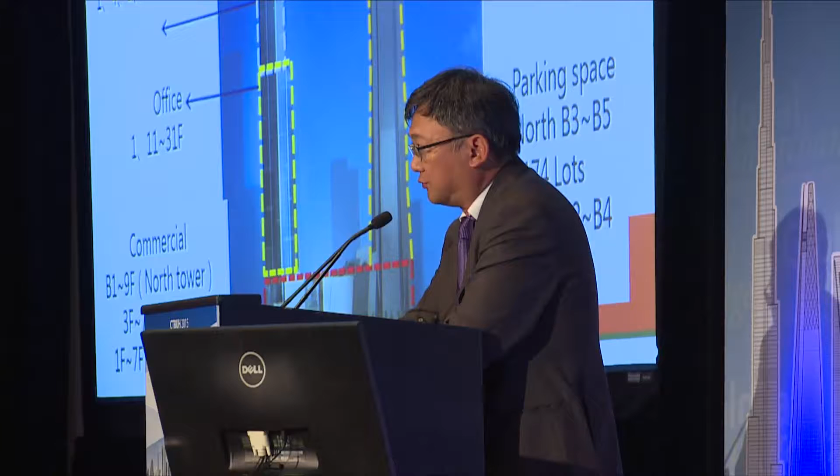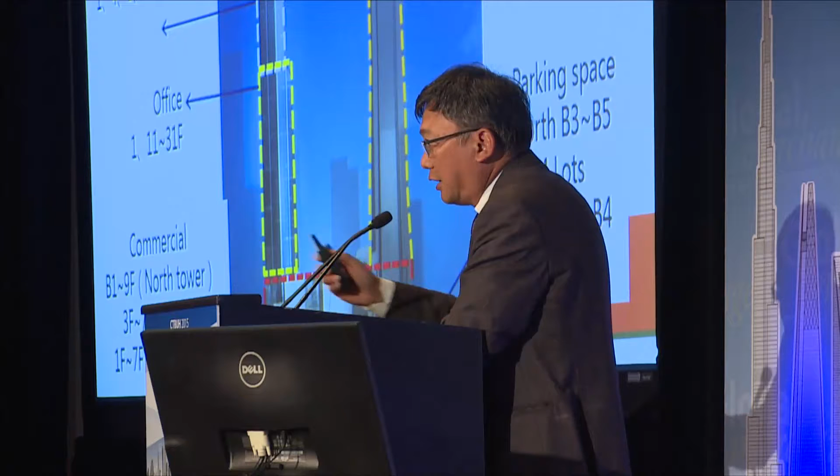We do have a commercial component like a shopping arcade at the podium level, which will support users of the office and also serve the vicinity as a high quality shopping area. We have 5 basements, dug up to around 25 meters, providing mechanical space in the basement, as well as 1,600 lots of car park.

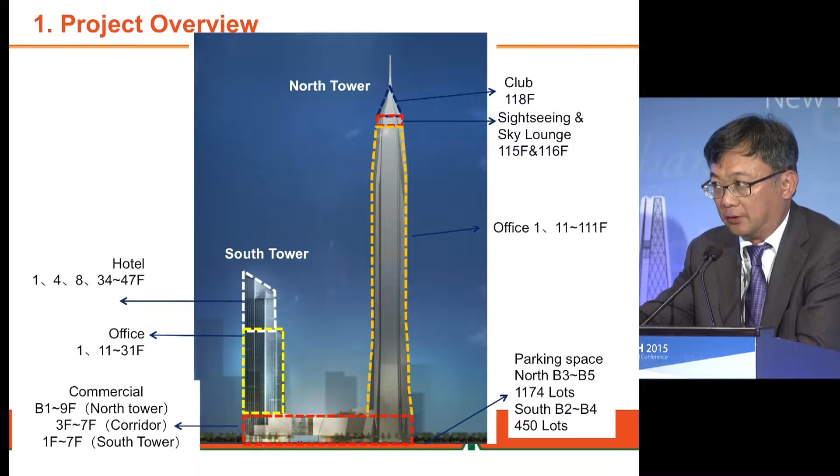Location-wise, we are very close to Hong Kong ICC. There is construction of the express railway from Hong Kong to Shenzhen, which will take 14 minutes, so that's the connection point to Hong Kong. We also have local connection through the MTR system, with 4 lines connecting to the site or the building.

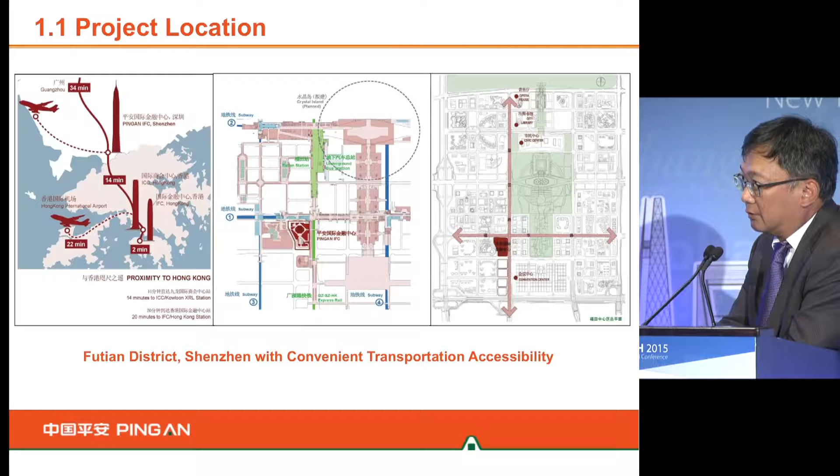We're also sitting on the axis of the municipal building, connecting the convention center and the municipal city hall at the center of the axis. We are actually founding the axis, which is very obvious in the location.

Figures about our building - this is the North Tower. I won't go into detail, but there is a 19,000 square meter site, and the total construction area above ground is 377,000, and the total construction area is close to 460,000 square meters. So we are talking about very high density development there. We have 118 floors above ground altogether, and everything - we have a hybrid structure with outrigger.

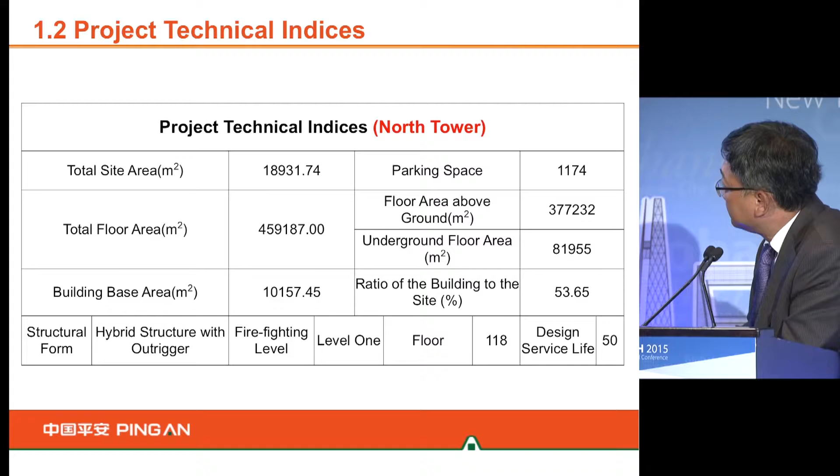This is the South Tower, 300 meters in height. We have 52 stories. The total area will be close to 200,000 square meters on an 11,000 square meter site.

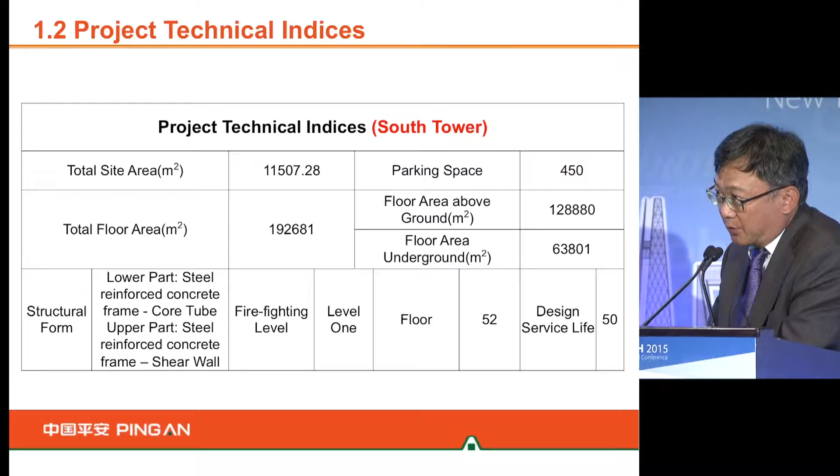Talking about the North Tower, the ideas come from the architect as well as Ping An's culture. Ping An is an insurance company at the beginning - we started our business in 1988 as a small insurance company dealing with property insurance or shipping. In these 27 years, it has expanded its business to banking as well as investment. So our project office is actually funded by the insurance arm, Ping An Life Insurance.

The idea is taking up the forces, and we want to improve ourselves daily, monthly, yearly. We want to go up and up - that is the idea of the corporate culture. So Ping An is improving, not just for getting more profit, but also to be more advanced in serving the public as an insurance company, as well as expanding our banking service. We also want to go more advanced.

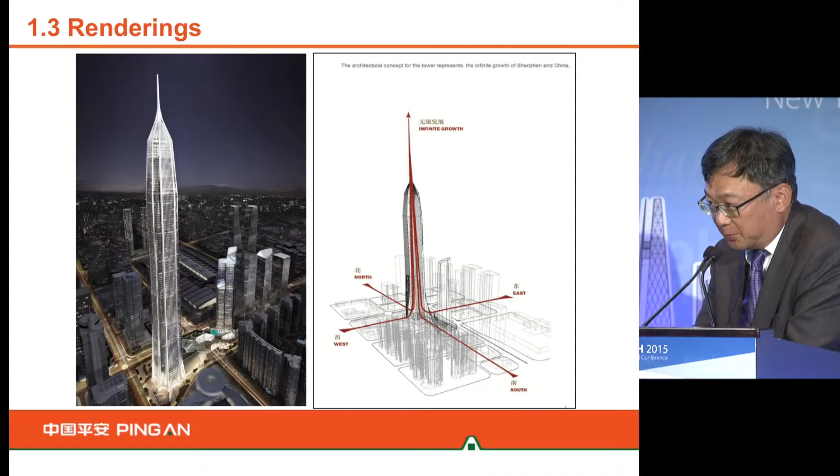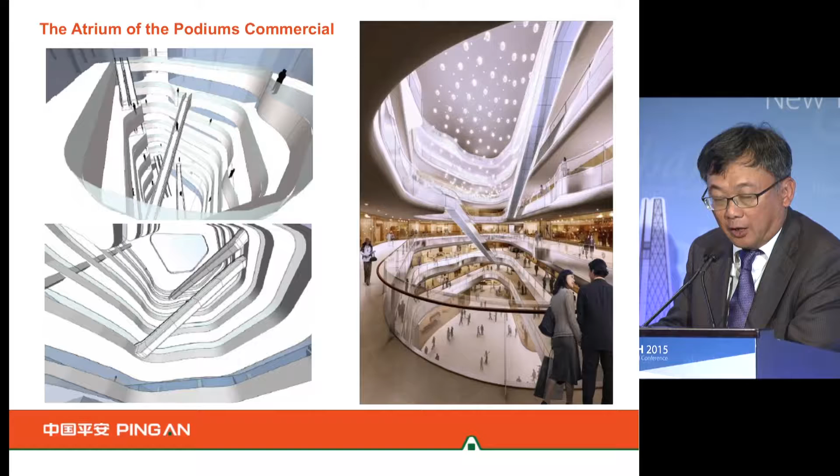Our podium takes a very free-form and organic shape internally, but externally is very solid and iconic in nature. We have a high ceiling lobby, but we want natural light to come in, we want natural materials to be fitted, and we want people to easily go around the building. We have multi-story lobby levels, so people can easily find their way up to different floors.

We mainly use around 50 double-decker lifts to resolve the demand of vertical transportation.

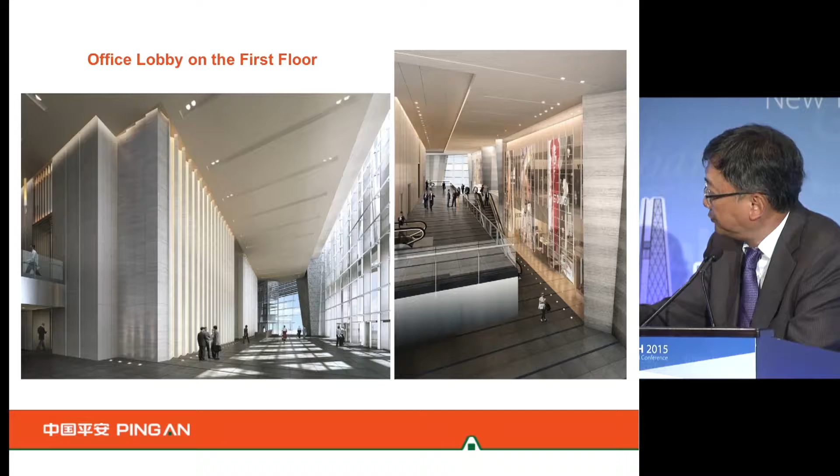Typical floor looks very square. We have a 32-meter square core, nearly square core, with about 13-meter depth span, leasing span. When you go from the bottom, it is even bigger, going from 65 to around 60 meters or even less as you go up to the top.

We have mega columns as the outer rim connected by mega frame, and we have a reinforced concrete core inside.

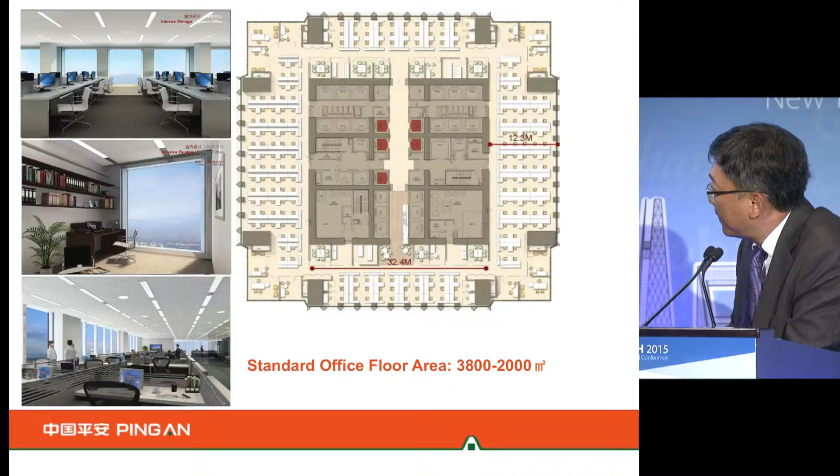Observation deck at the top to serve public interest, to be a landmark building. We need to bring people up to the sky or to the height so they can enjoy the view around the city.

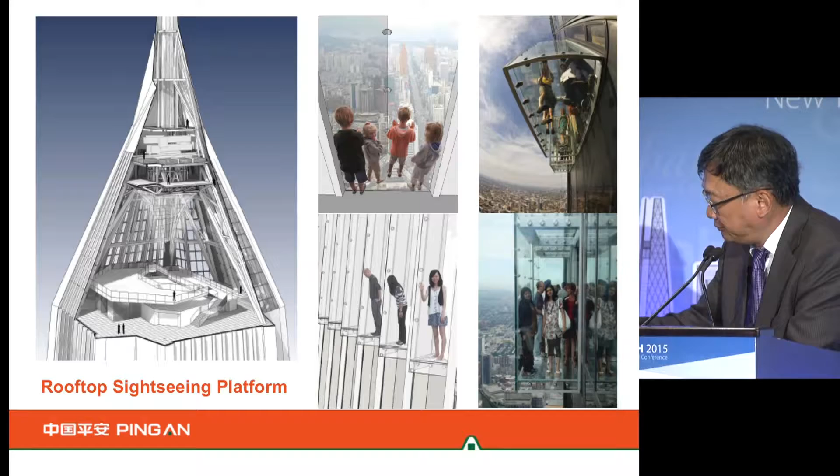We want to create seamless connection between the building and the vicinity. We use minimum identification between the boundary, and we want soft landscape to go together with the hard paving to create a friendly and inviting entrance. The glass at the bottom will give us a very transparent feeling.

We also create landscape or interested outdoor areas. One is for dining, one is for the shopper, to relate to the natural external.

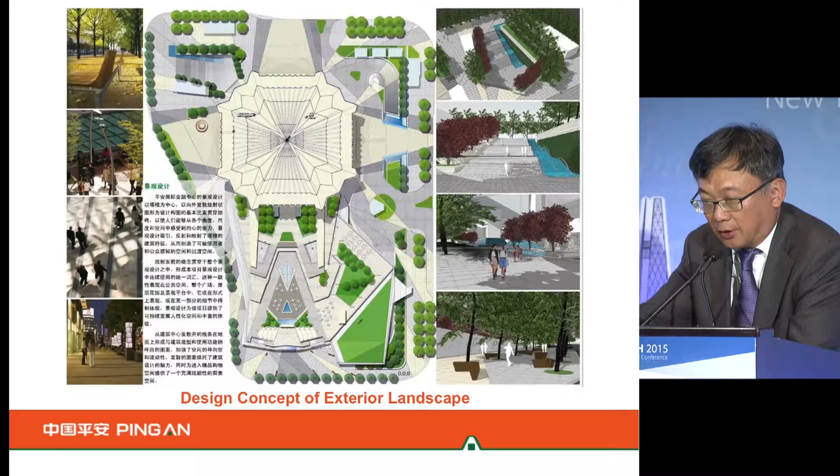We take a look at the structure of the building, because that will give you the idea of the bulk of the construction work, and then relate to the risk in the construction process.

Basically, as I mentioned, it's an RC core strengthened by the shear wall inside, and also reinforced by Outrigger. I think there are 4 Outrigger trusses, which give the rigidity of the structure, connecting the mega frame outside and the inner core internally.

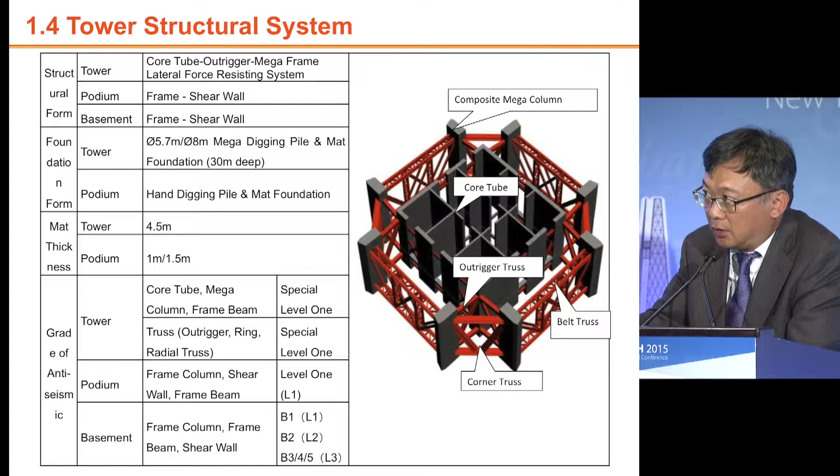So there is a simple diagram showing we have the RC core plus the Outrigger at 4 levels, plus the mega frame externally with cross bracing, making the structure very rigid and strong.

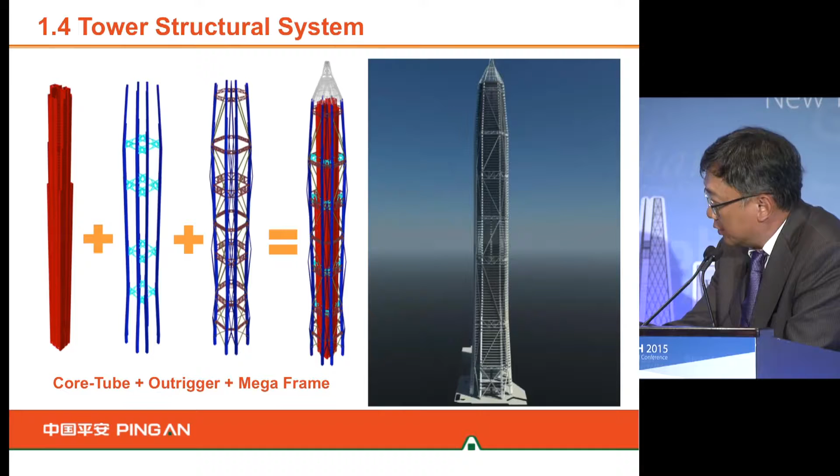That tells you how complicated the steel connection is - all prefabricated steel elements hoisted from the ground to the appropriate level and welded at height. So you will see the complexity of the structure in this diagram.

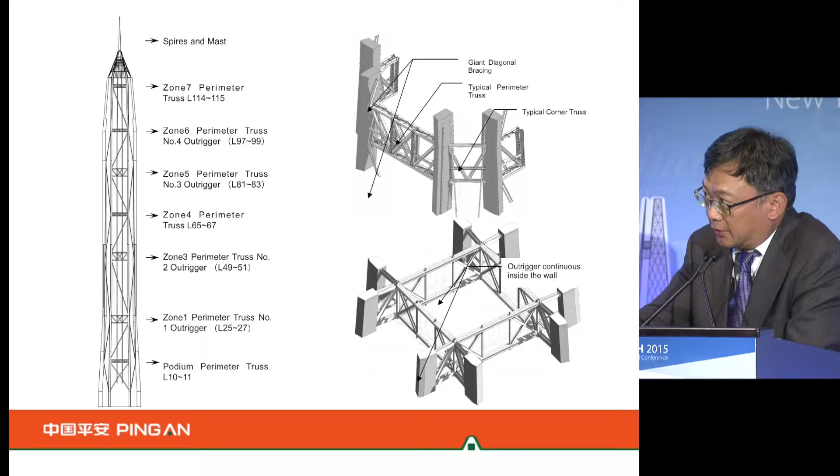And the construction risk that we are facing throughout the construction period - I found the underground structure, although not seen, is very risky and time-consuming.

We need to dig very big piles. The biggest one is 8 meters in diameter, ranging from 5.7 to 8 meters. And it is sort of a hand-dug process. When we say hand-dug, it's a manual operation, not actually with your hand.

So there will be 16, around 6-meter piles to support the core, and 8-meter diameter piles to support each of the mega columns, and there are 8 in total.

We put reinforcement one by one in the pile before concreting. So these are all manual operations, and you can see there's high risk working in this situation.

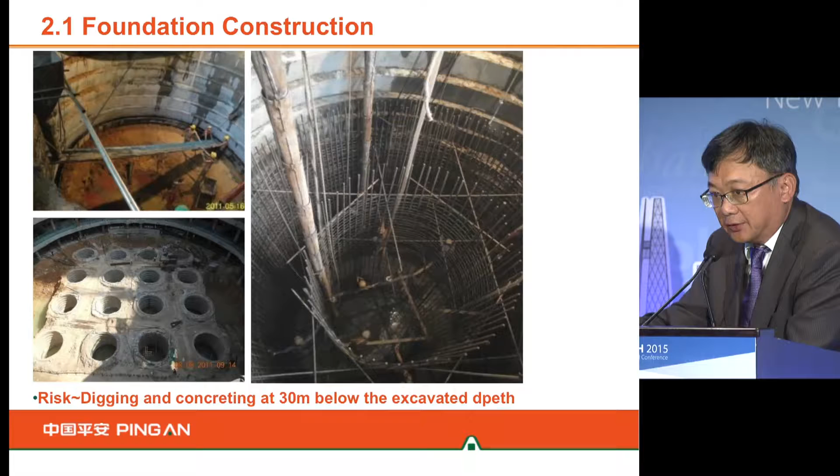There are also risks externally, like natural risk - typhoon, flooding - and we need to hoist heavy steel structure to the top of the building. So it's another risk that we need to face.

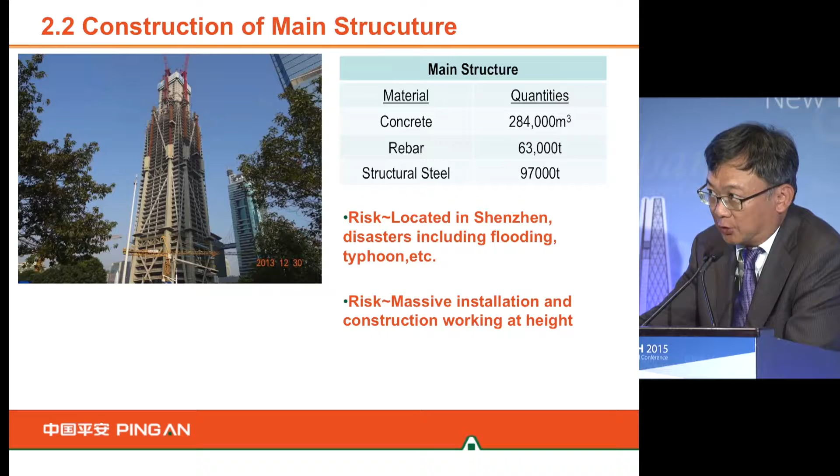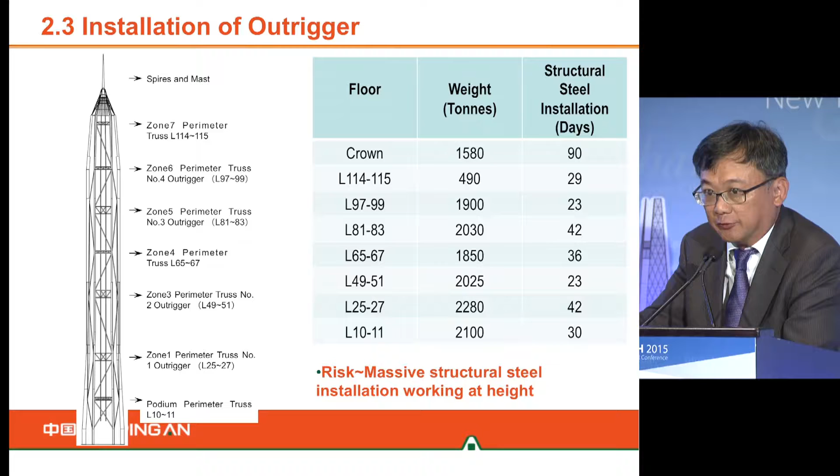For floors, we can go up to two days per floor, and somehow we spend 7.5 days - it depends on the complexity and whether they are standard. So we carefully plan our workforce and round the clock to make sure we do it in a very efficient way.

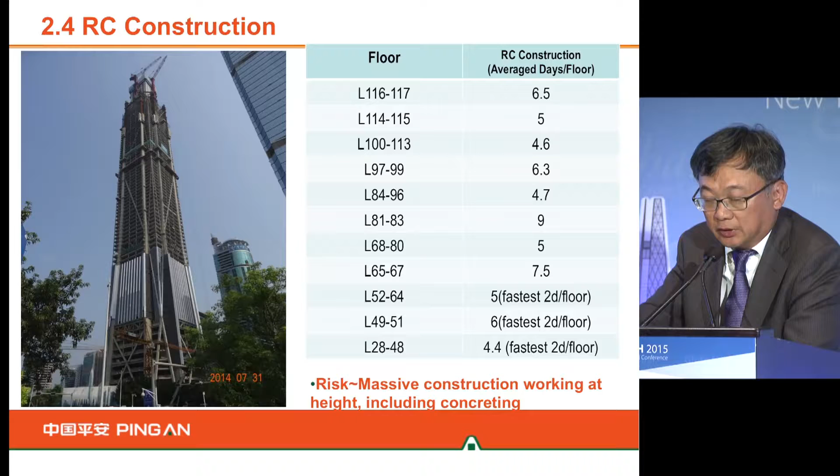Curtain wall system - it goes up to 17,000 panels, and the figures about the glass, aluminum, and stainless steel. So I leave it to you to read.

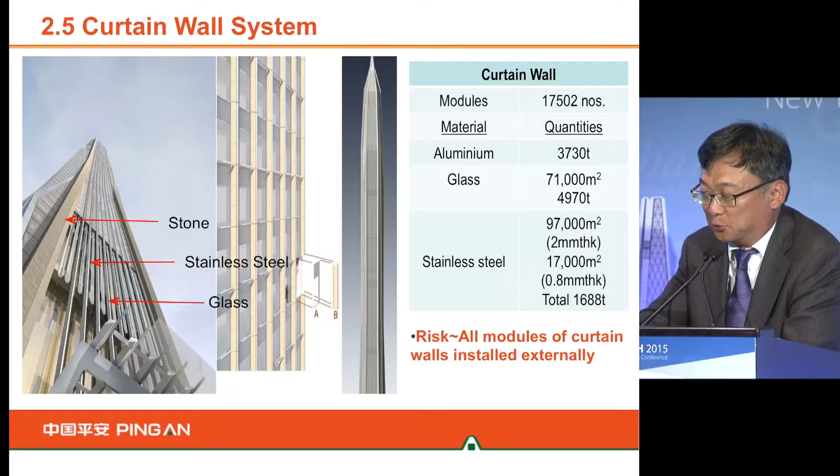By end of the year, we will finish the top part of the curtain wall. By April next year, we will finish all the work for inspection.

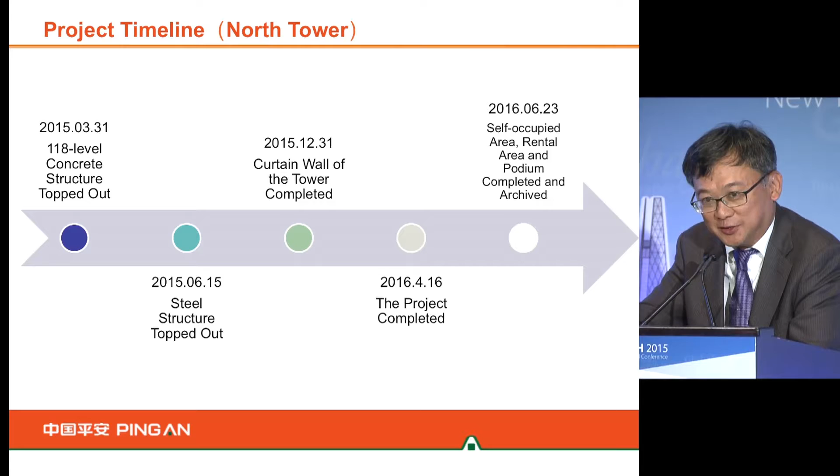At the mid of next year, our headquarters will be in use. So these are very aggressive targets. I think one reason is because we have waited a long time to move in as the headquarters of Ping An. And Shenzhen is longing for a landmark in the vicinity. Most important, we have commitment to the council about next year's conference. So we have to do it.

So the third section, I leave it to Stephen.

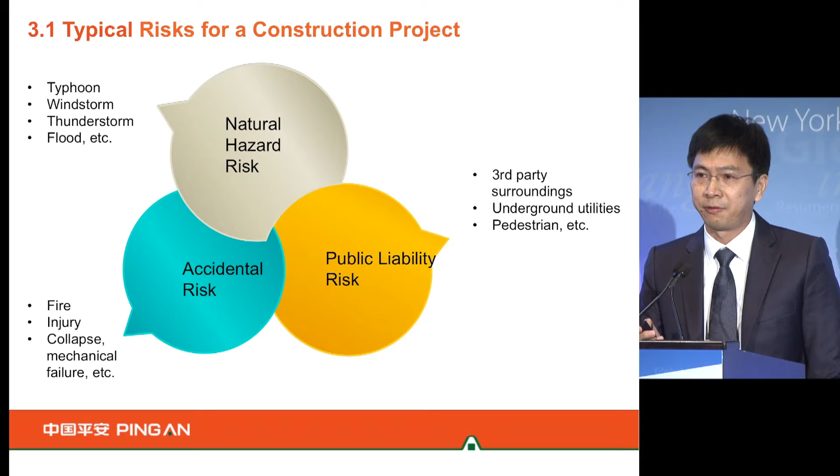For accidental risk, just similar to other construction sites: fire, injury, collapse, mechanical failure, electrical failure, etc.

For natural hazards, our company has a very powerful system named GIS system, which means Geography Information System. If you input the address, for example for the Ping An Finance Center, the system will automatically tell you the risk level of this site.

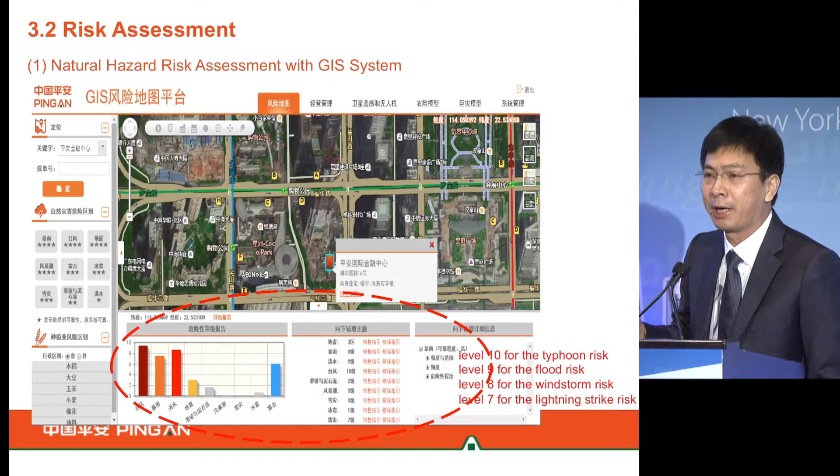For example, for this site, the typhoon risk is level 10, flood risk is level 9, windstorm risk is level 8. All these risks are very high. These pictures are captured from the system.

Different risks have different layers, and each layer has different colors. From the color, you can find out the risk level.

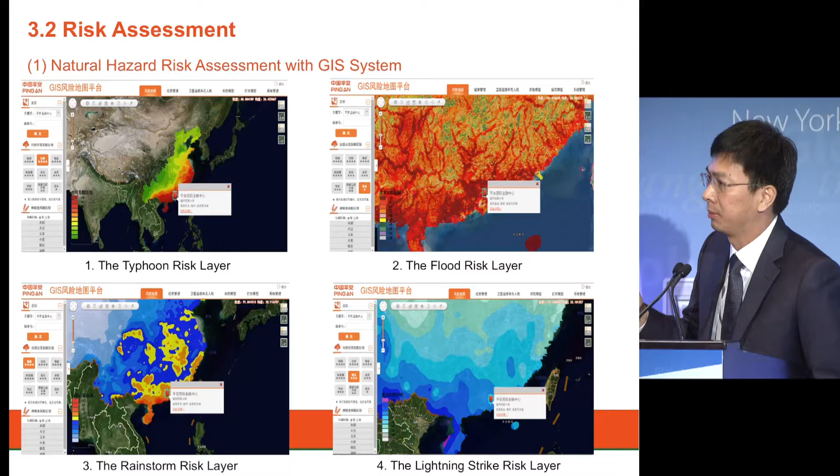For property and casualty risk assessment, that means for public liability risk and accidental risk assessment, we send our engineers to the site and do the risk assessment on site. We use internationally popular risk assessment methodologies to do the risk assessment.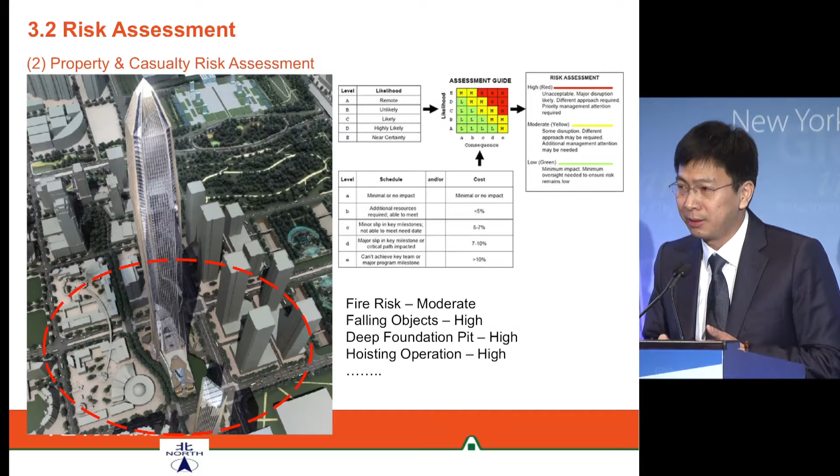We quantify the risk by using 2 risk factors: one is likelihood, and the other is consequence. After the risk assessment, we got the risk level for fire as moderate, falling objects as high, deep foundation pit as high, etc.

After the risk assessment, we can develop a tailor-made insurance program for Ping An Finance Center. There are some experiences I would like to share with you, one is about insurance policy.

Normally, the common practice for insurers is to use one policy to insure the whole project because it's convenient for underwriters of insurance companies. But the premium rate may be a little bit higher than separated policies. So we required 2 separate policies for pile foundation works and other construction works accordingly.

Because the insured value of pile foundation works is a very small part of the insured value of the whole project, if we use one policy to cover the whole project, the underwriter will consider the risk of pile foundation works first, because this is not their favorable risk. They will quote a higher rate. So we asked for 2 separate policies for pile foundation works and other construction works.

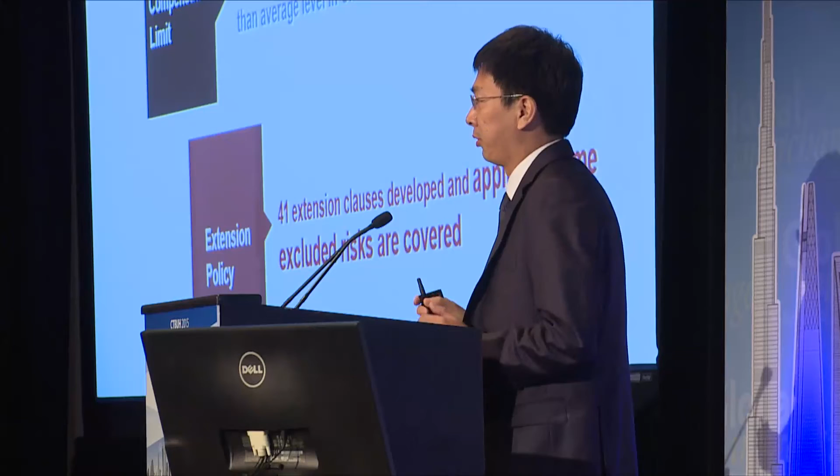This is one experience for you. And another experience is about policy wording. There are 2 different products for project construction insurance: one is CAR and another is EAR. CAR is for civil construction, and EAR is for the equipment erection phase.

So if you use two products to insure your project, it may bring problems because they are cross-working during the whole project. So we use just one CEAR policy to cover both civil engineering and the equipment erection phase. Okay, time is limited, so I will go fast.

Another experience is about the compensation limit. We consider the location, the city, and the surroundings, and the extension of policy wording.

CEAR means Construction and Erection All Risks, but we should never be cheated by this policy name 'all risks' - it does not mean all risks. It has some exclusion clauses inside the policy, so we must be careful. So we require 41 extension clauses applied.

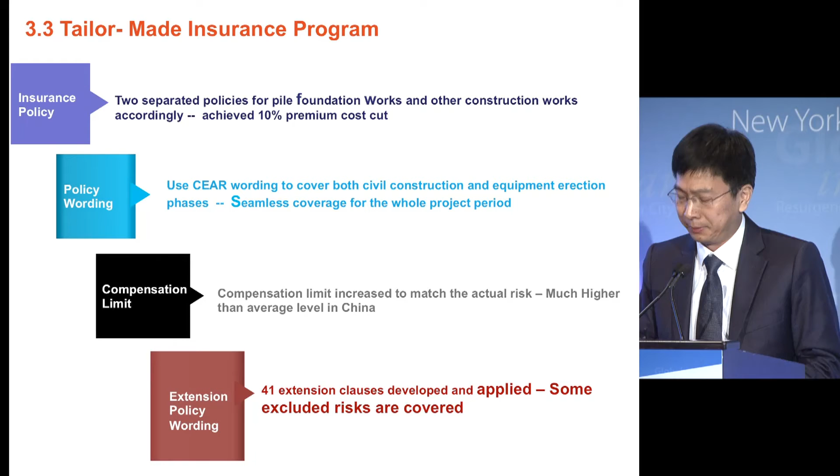So for the whole process, Ping An Real Estate and Ping An P&C Insurance are working together as a team. We have the same target, and finally we have good safety performance. You can see the loss ratio is only 13%.

While in China, the industry loss ratio is about 48% for tall building construction insurance. These are some examples of the loss control service we have done for this project, including trainings and our recommendations implemented by Ping An Finance Center.

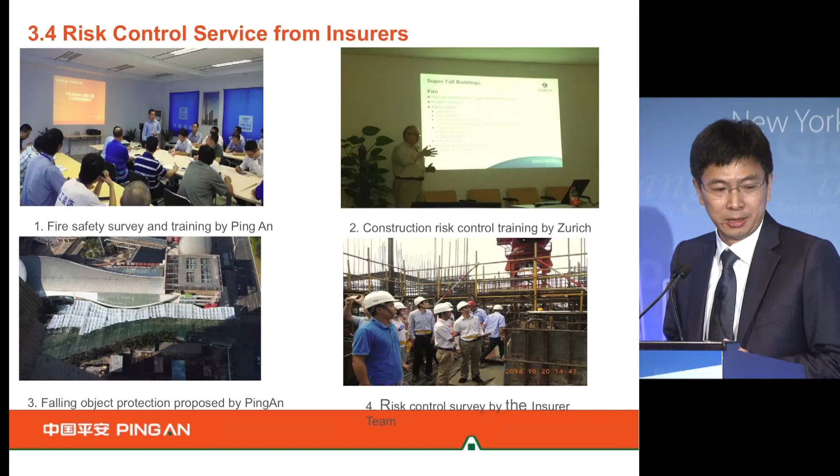Finally, I will introduce what we have learned. This is a win-win solution for both sides. One suggestion for you: if you have business in China and want to find an insurer, please try to find a professional one. Ping An is the best one for you.